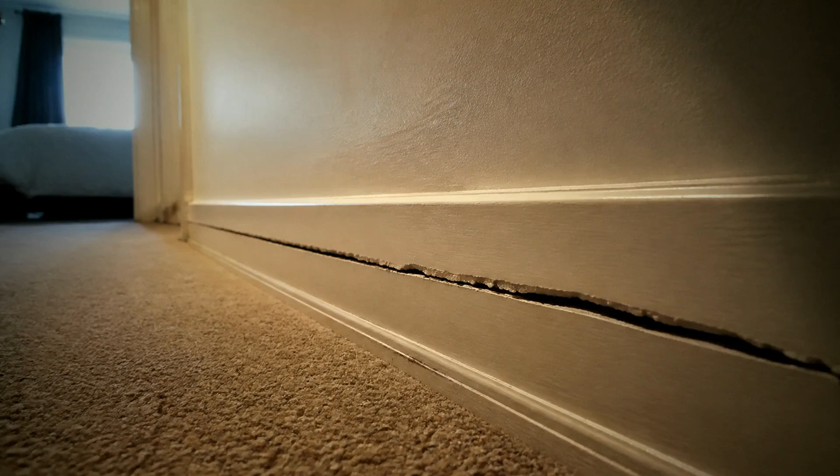Now, walk to the far corner. Try the door. It sticks. It binds in the frame. You have to shoulder it. Look down the hallway toward the bedroom. See that crack running the baseboards? It was not there last month. Or the month before. Now I want you to sit with this for a moment.

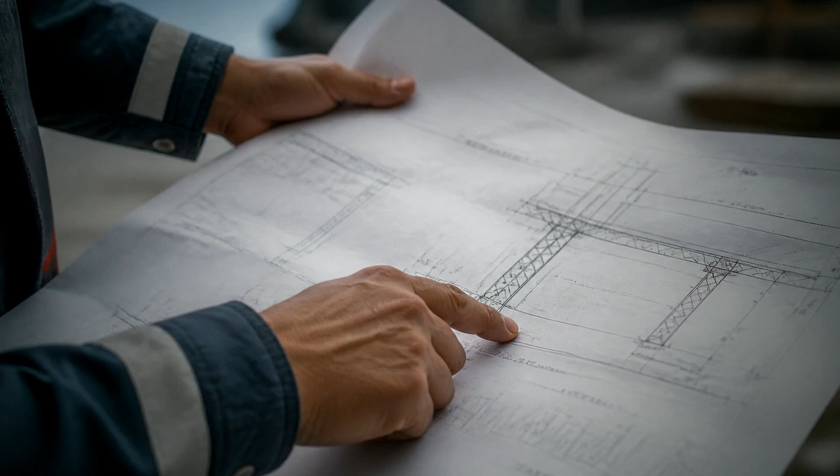This building is sinking. It has been sinking since the day it opened, and nobody told you. I am Dr. Hendrik Bale. I have spent my career reading what buildings do when we get the foundation wrong. My father was a structural engineer. He taught me to trust what the ground tells you first.

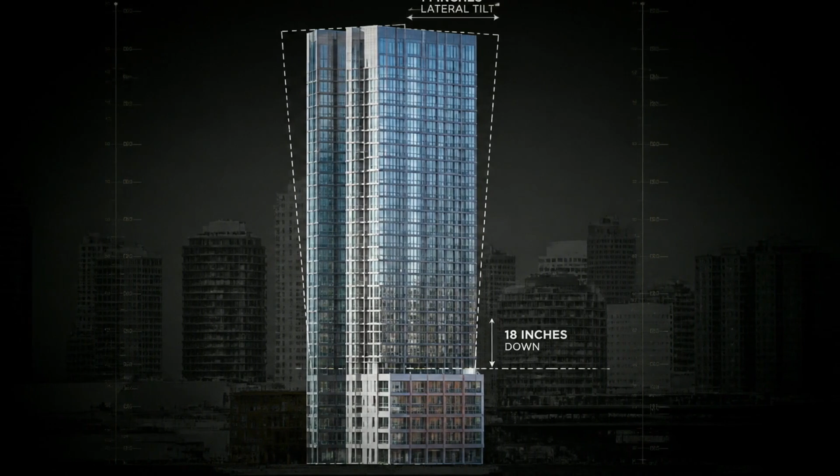What I am going to show you is how a $350 million landmark nearly destroyed itself. The sinking started in 2008, the moment construction finished. 18 inches down, 14 inches tilted to one side, all of it hidden. By 2016, when the truth broke into the newspapers, residents had already paid millions for the privilege of watching their building collapse under its own weight.

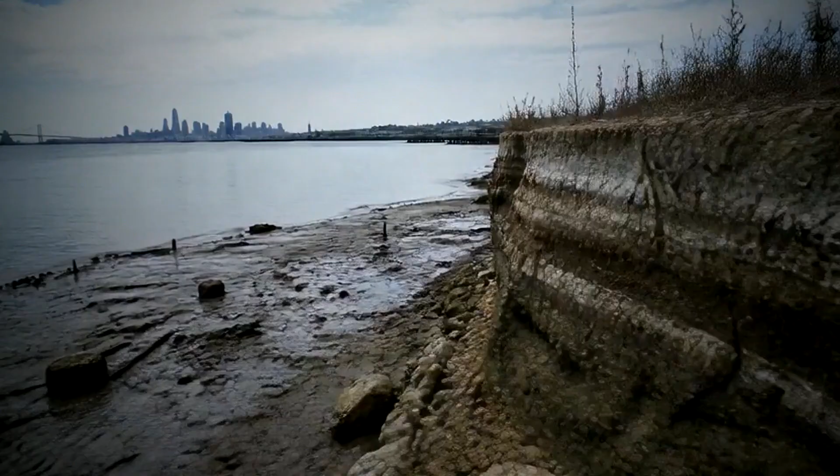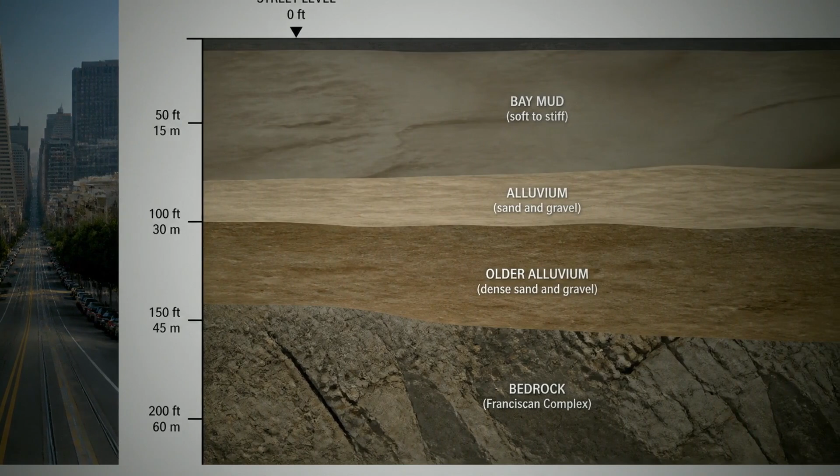This is the story of how that happened, and it starts with a choice made before the first beam went in the ground. You see, the architects and engineers faced a problem that day. San Francisco sits on bay mud, soft mud, the kind that compresses when you load it. A tall building there needs anchors driven deep, down to bedrock, 200 feet below street level. That costs money. Serious money.

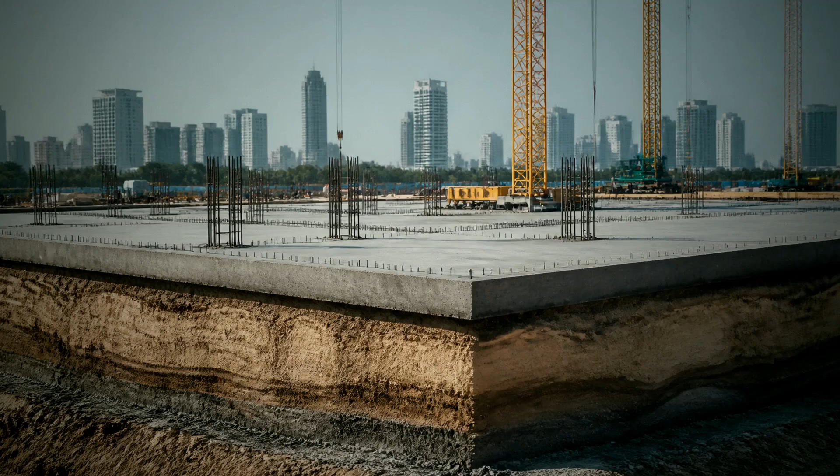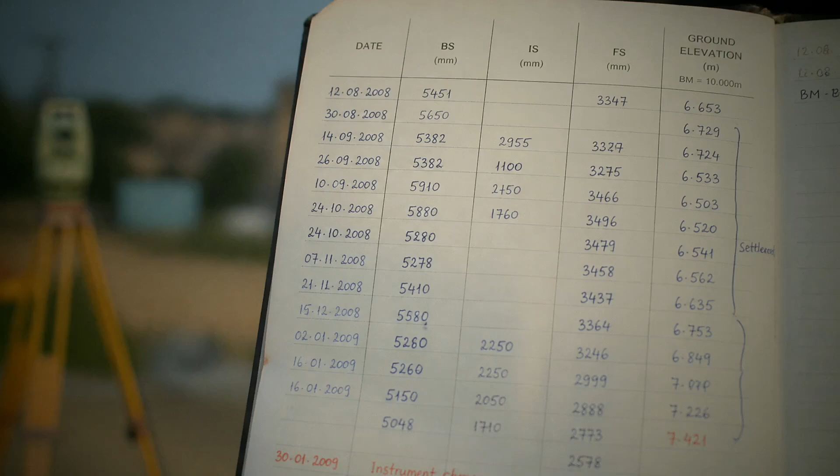So instead, they chose a concrete mat, a thick slab sitting on sand, on clay, and nothing deeper. It was a choice that looked fine on paper. It was not. And here is what makes this story interesting. The sinking started immediately, and they measured it the whole time. But nobody saw what the numbers meant, not for 8 years.

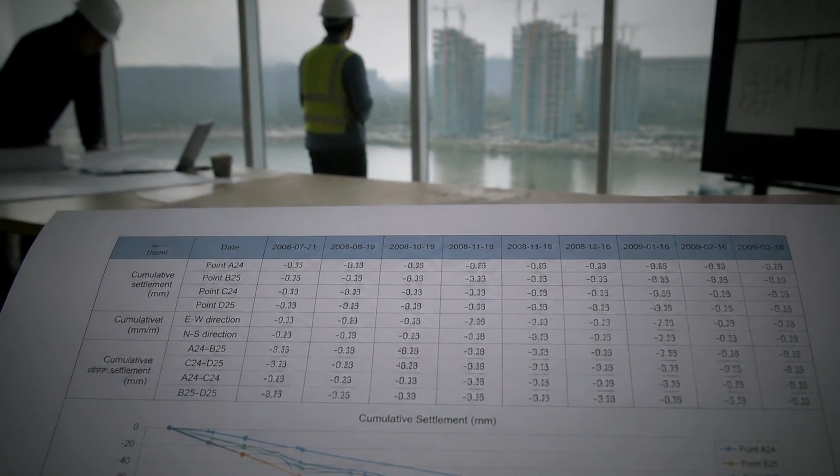Now, the reason for that sinking goes back to one decision the engineers made about how deep to anchor and what they decided to skip. Stay with me, because at the end, there is a detail about what happened to the soil next door that changed everything. That detail is what finally forced the city to wake up. So the building is already sinking, and now I need to show you the exact moment this was decided, the choice that made it inevitable.

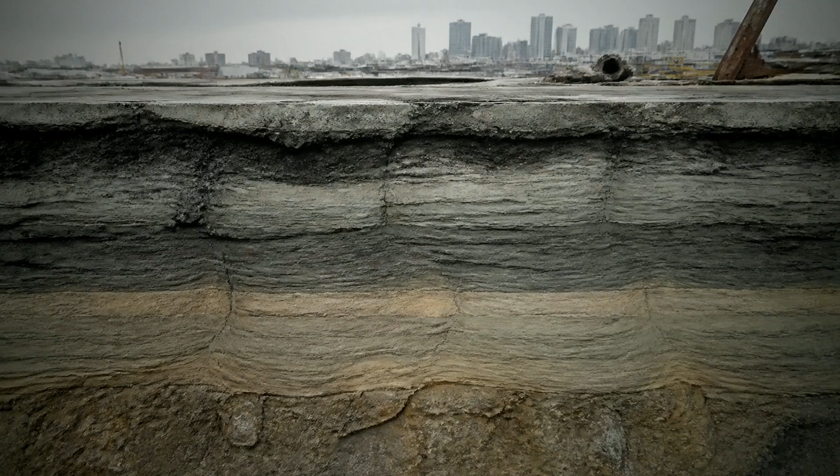In 2005, DeSimone Consulting Engineers sat down with the geotechnical team to design the foundation for 301 Mission Street. The bedrock beneath San Francisco lies roughly 200 to 265 feet down, buried under bay mud, soft as wet clay. Every engineer in that room knew bedrock was down there, solid, capable of holding the weight without moving an inch.

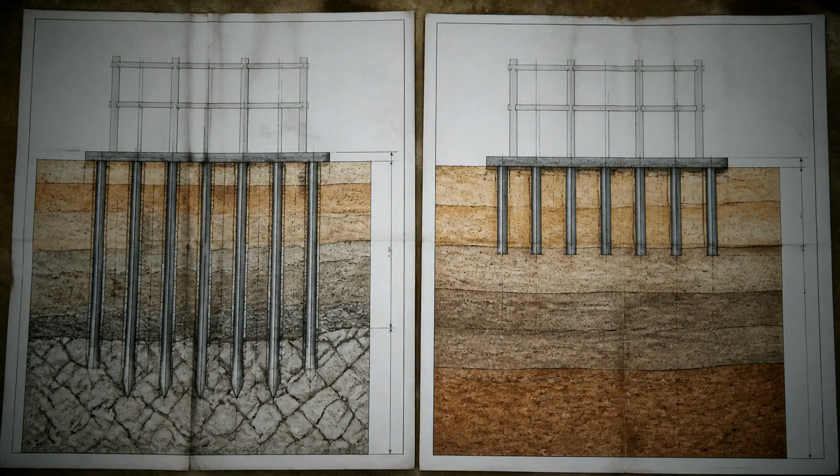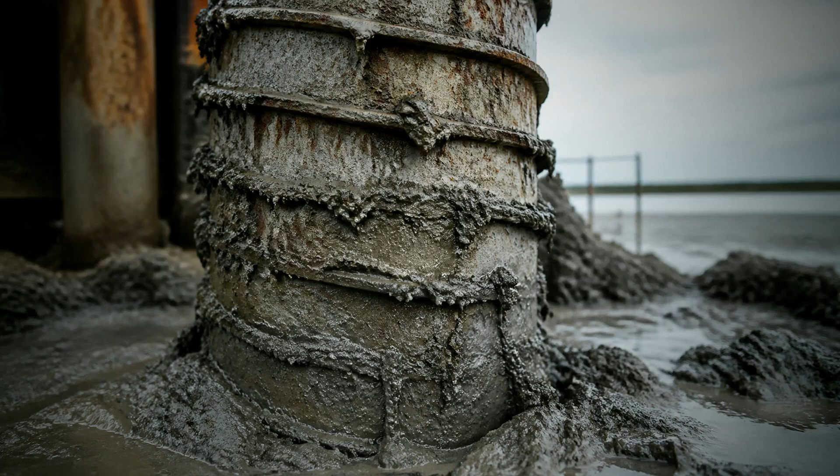But look at the two options on the table. Bedrock piles cost more money and take more time to drive. Friction piles, 950 of them, each 24 inches thick and 80 to 90 feet long, sit in the compressible mud itself. The friction piles grab the soil along their entire length, like fingers clutching sand. In firm soil, this works. In bay mud, you are counting on something that never stops moving.

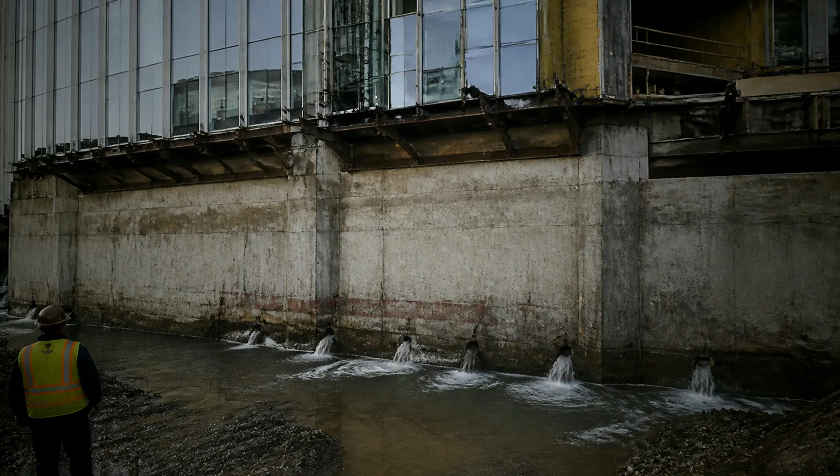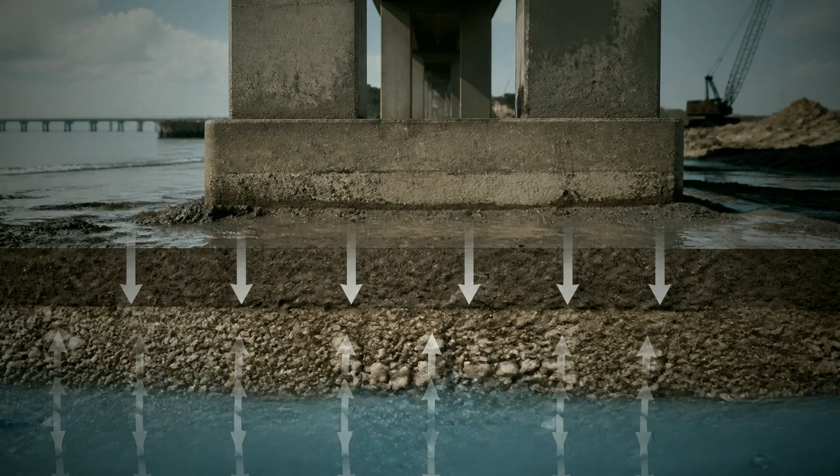Here is what I need you to understand about bay mud. It is young clay, loaded with water between its particles. Under the enormous weight of a 645-foot tower, that water has nowhere to go but squeeze out, slowly, over decades. As the water leaves, the clay compacts. The whole foundation sinks with it. The design allowed for some settlement, maybe 2 inches, maybe 3. The engineers ran the math and filed the permits.

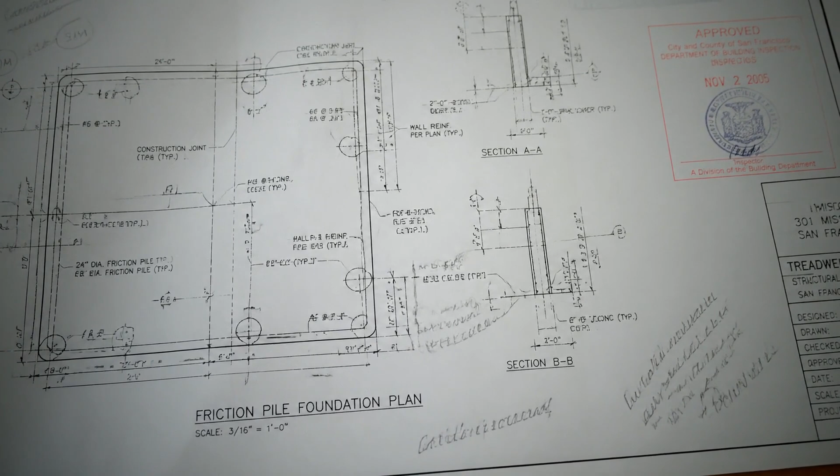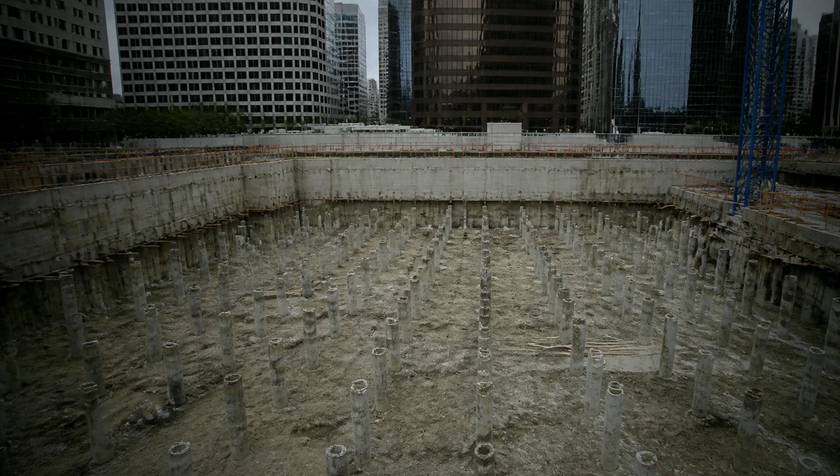The San Francisco Department of Building Inspection reviewed the plans and approved them. Friction piles were permitted under code. And there it was. The foundation system that would sink the Millennium Tower was locked in. November 2005. The Salesforce Tower, built right next door, went deep to bedrock at 260 feet. A different choice entirely. But Millennium Partners had chosen the faster, cheaper path, and 950 piles were driven down into soil that would compress for the next 2 decades.

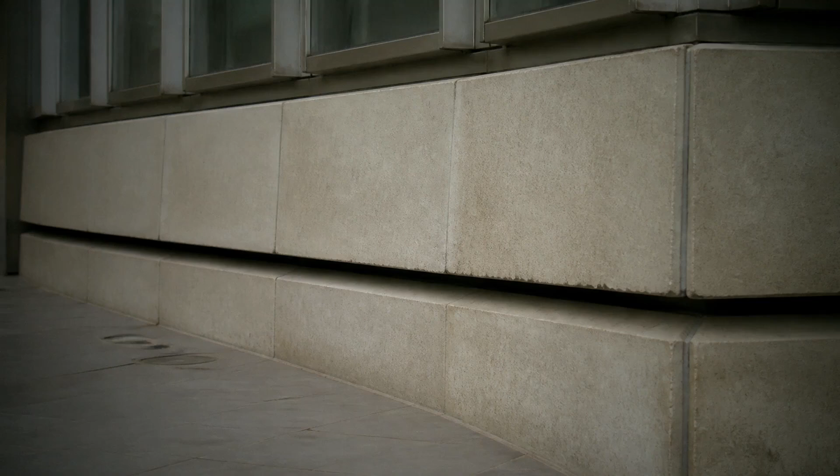By 2009, when the first residents moved in, the building had already begun to settle measurably beneath their feet. No one saw it. No one felt it. The sinking had started. But something else was about to happen just blocks away. Something that would turn the slow compression into a crisis.

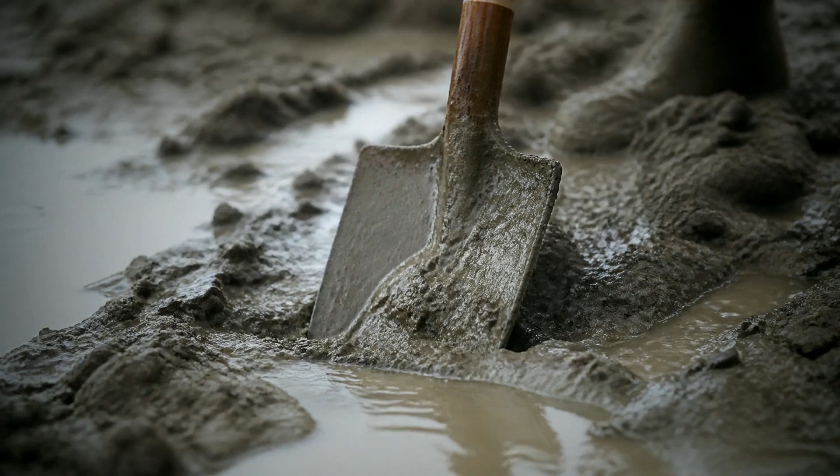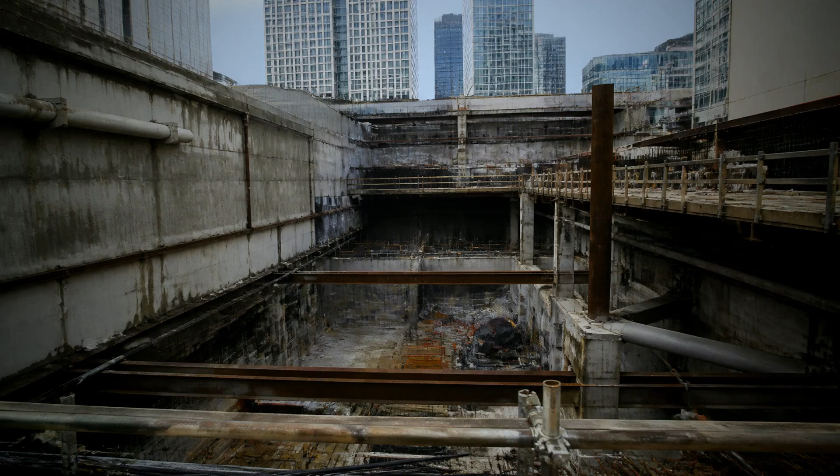So, the Salesforce Tower next door chose bedrock anchors. The Millennium Tower did not. Now watch what happens when that choice meets a shovel. In 2010, the Transbay Transit Center project broke ground across the street. That is a bus terminal. It sits mostly underground. To build underground in soft ground, you excavate. You pump the water out.

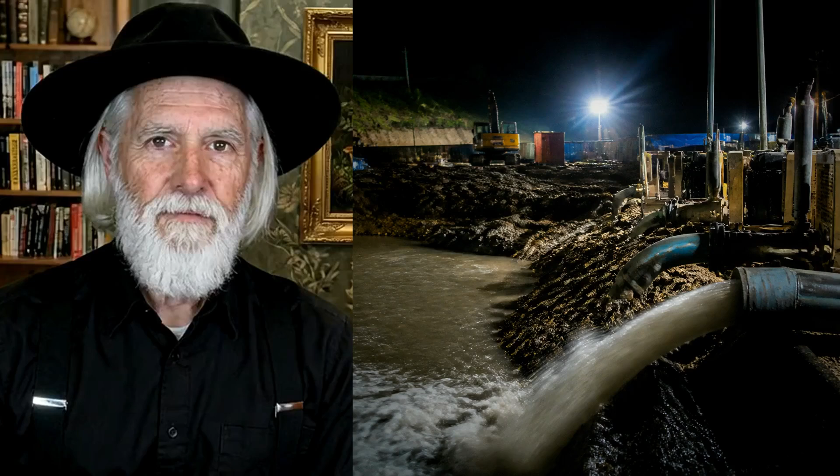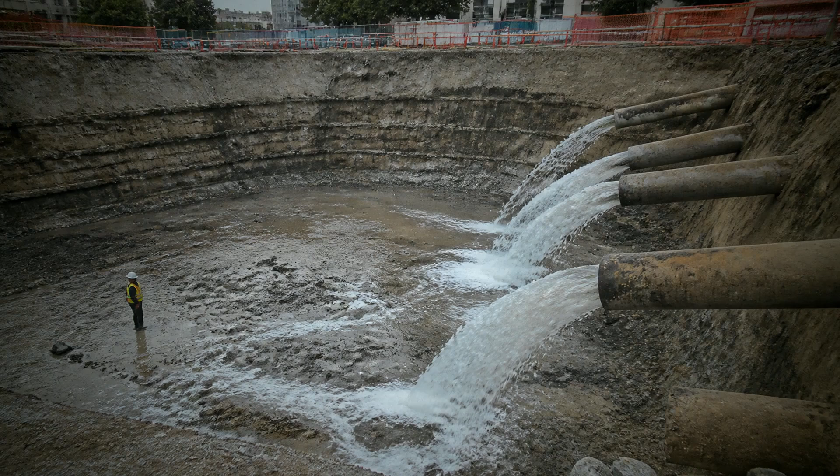I have done this work myself. The pumps run day and night. They pull millions of gallons of water from the soil around your site. You are standing at the edge of that excavation, watching water spray from the dewatering pipes. The groundwater that held the soft bay mud intact, that water is gone now.

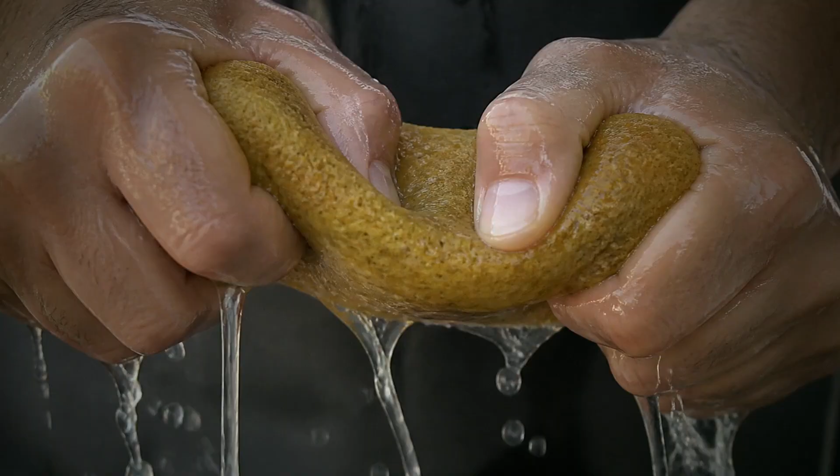Without pore pressure, clay and silt do one thing. They collapse and compact. Think of it like squeezing a wet sponge. The water leaves, the sponge shrinks. The Millennium Tower's foundation sat right next to those pumps, 65 meters away.

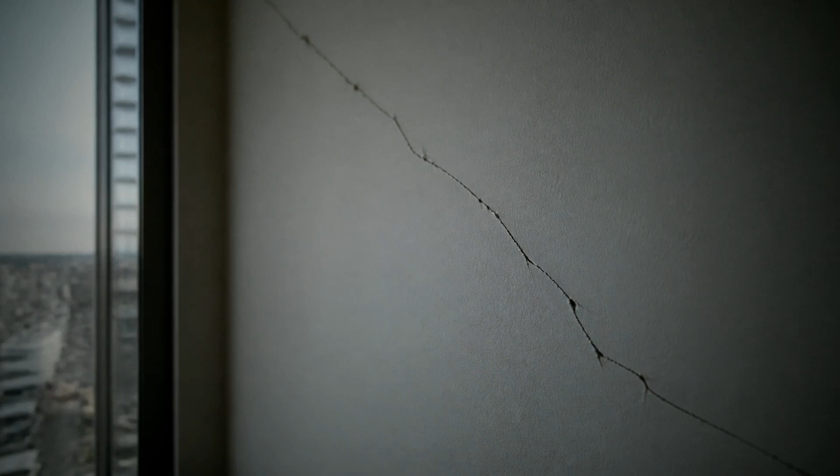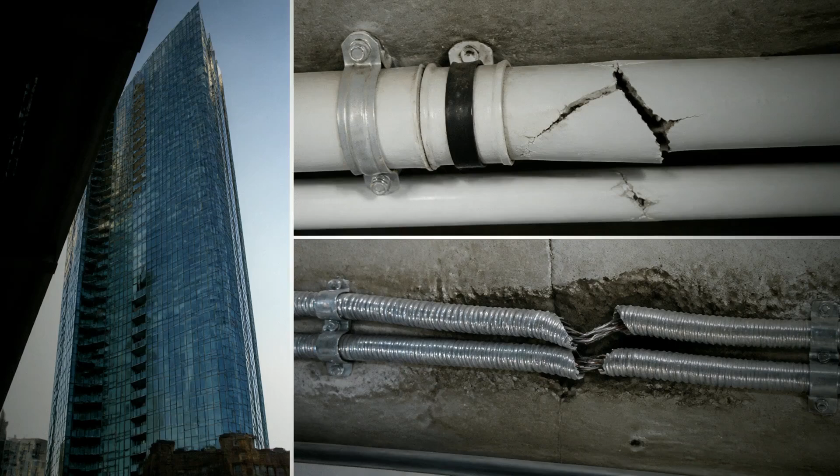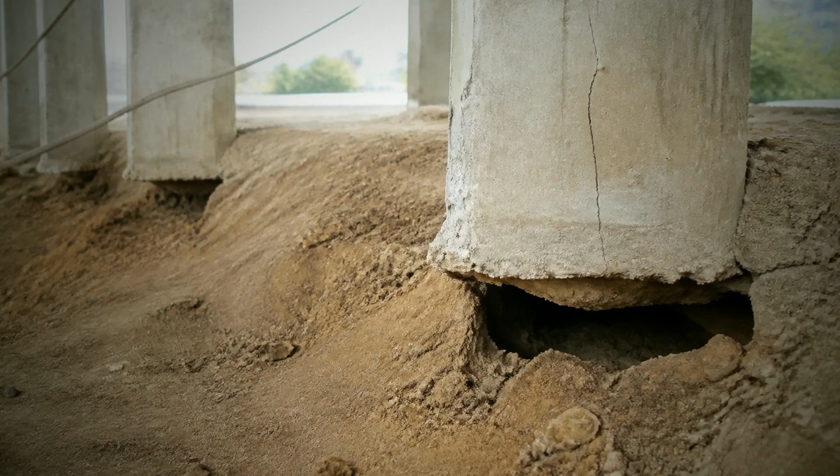After the pumps turned on, the rate jumped. The northwest corner fell faster. Differential settlement. That is what engineers call it when one side drops more than the other. The building began to tilt like a ship settling unevenly into the harbor. Elevators bind in their shafts when buildings tilt. Utility lines rupture or pull tight.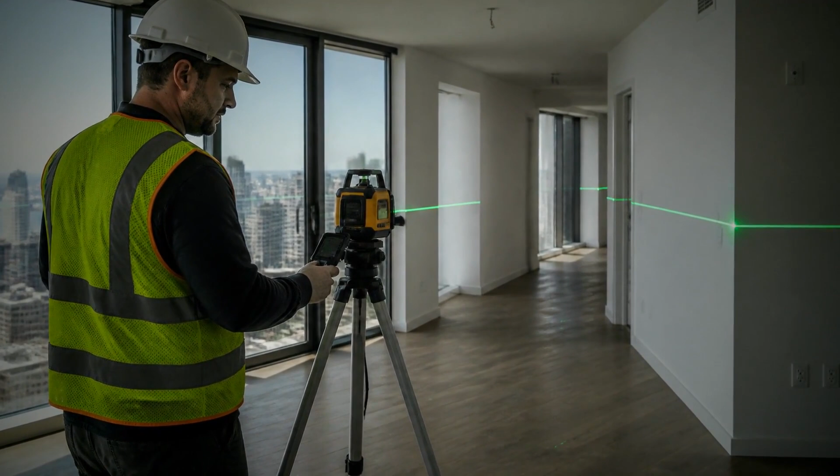You have concrete pilings designed to carry load straight down into stable soil. But when the soil itself vanishes, when the water leaves and the mud compacts, the pilings fail to anchor. A condominium on the 42nd floor cost $3 million. The unit doors no longer closed. Residents hired surveyors. The data came back. The building was tilting visibly.

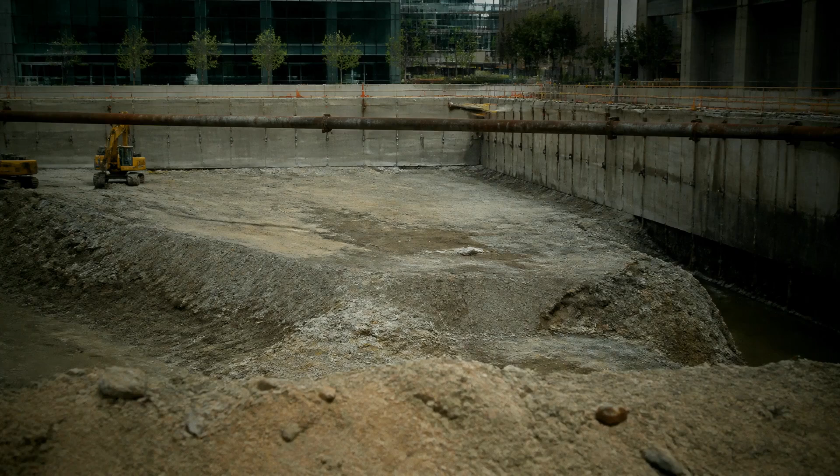By mid-2016, the San Francisco Chronicle published the first public report. That is when the silence broke. That is when lawsuits began. The dewatering was foreseeable. It was permitted. No recharge well had been installed. Nobody had re-injected water back into the ground to replace what the pumps removed. That failure, that single mitigation step, now stood at the center of the blame.

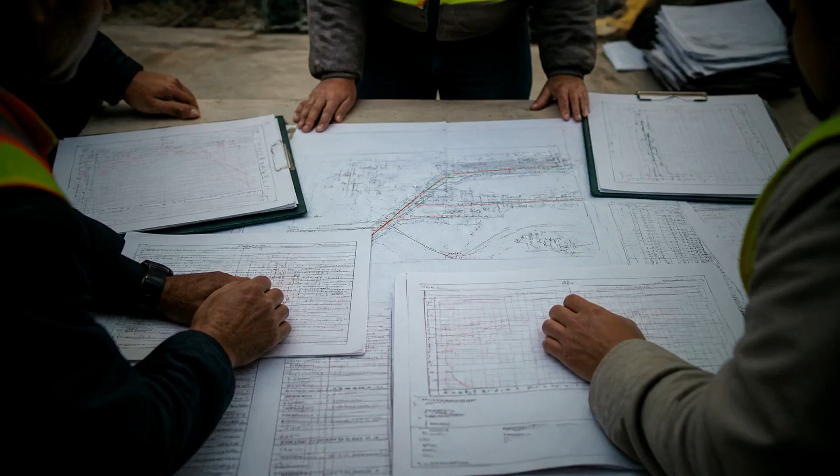And here is where the real battle starts. Two teams of engineers, each certain the other caused the collapse. With the building leaning and residents panic selling, the lawsuits arrived in 2016, and now the real engineering story had to be told in court. Millennium Partners pointed at the Transbay dewatering next door. The TJPA engineers pointed back at the shallow piles. Both were right, and that was the problem.

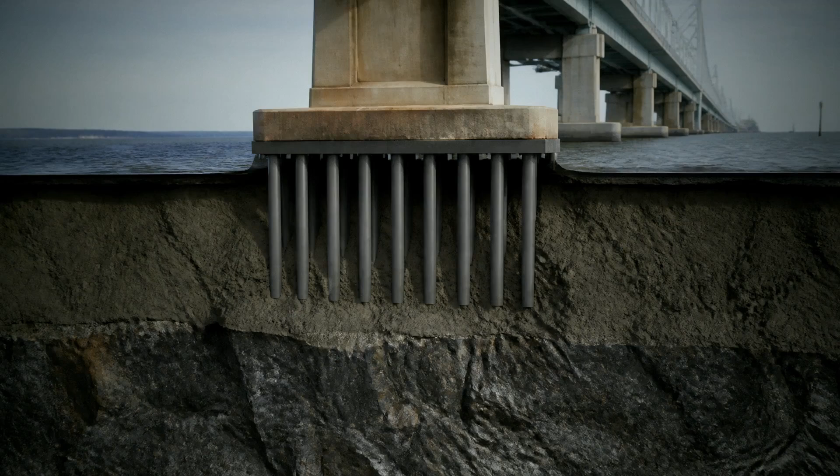You are in a deposition room. An expert is asked, did the building fail because of bad luck or bad design? The answer was both. The friction piles could have worked if the ground beneath them had stayed wet. Once the dewatering pulled the water away, the bay mud consolidated. 16 inches of sinking, 14 inches of tilt. The building's one fatal bet had been called.

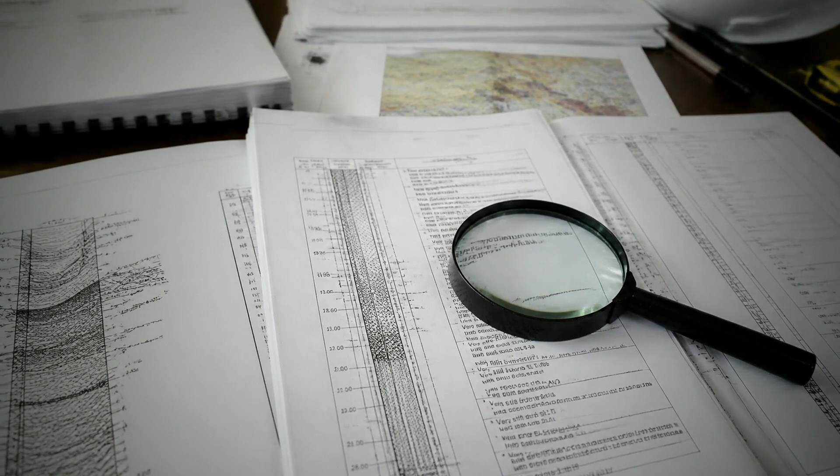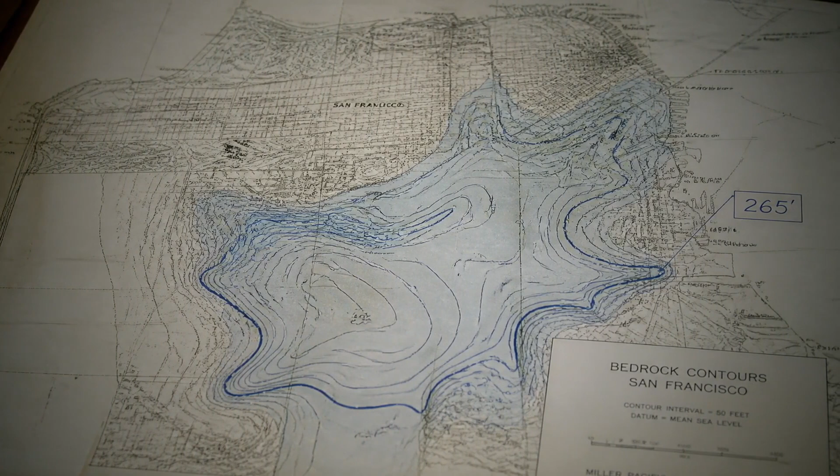And here is the part I promised you in the first chapter, the part that changed how I read every foundation report I see. The engineers who designed Millennium Tower had access to the same soil maps I do. They knew bedrock sat 265 feet down. They chose to stop at 90 feet. Why? Because bedrock piles cost tens of millions more. Friction piles were permitted by code. The code allowed a calculated risk.

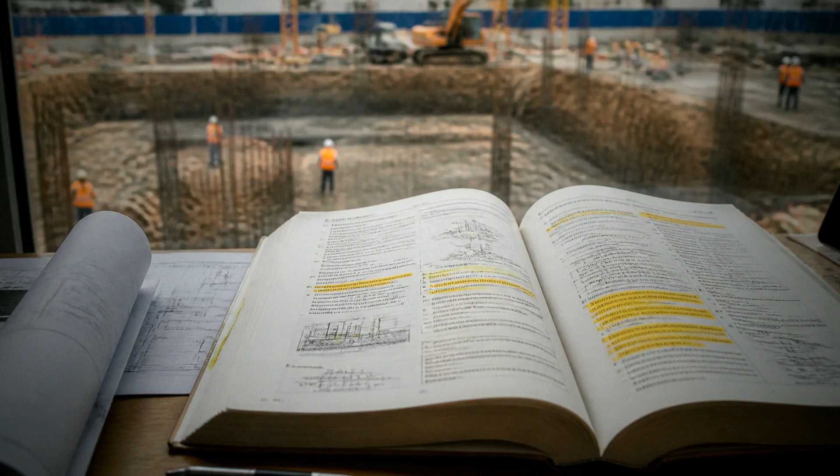And the code was written for normal buildings, on normal soil, under normal water conditions. Not a 58-story luxury tower. Not San Francisco Bay mud. Not adjacent dewatering. So the building did not fail because one person was careless. It failed because 4 decisions, each defensible alone, stacked into a tower that could not stand when the ground shifted.

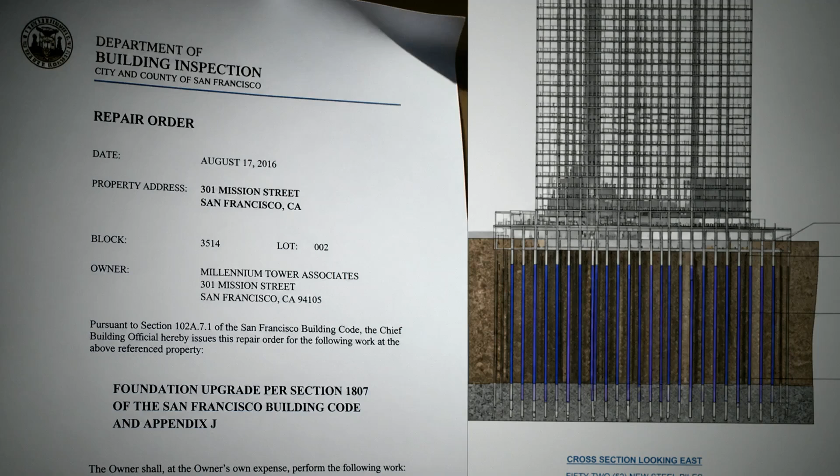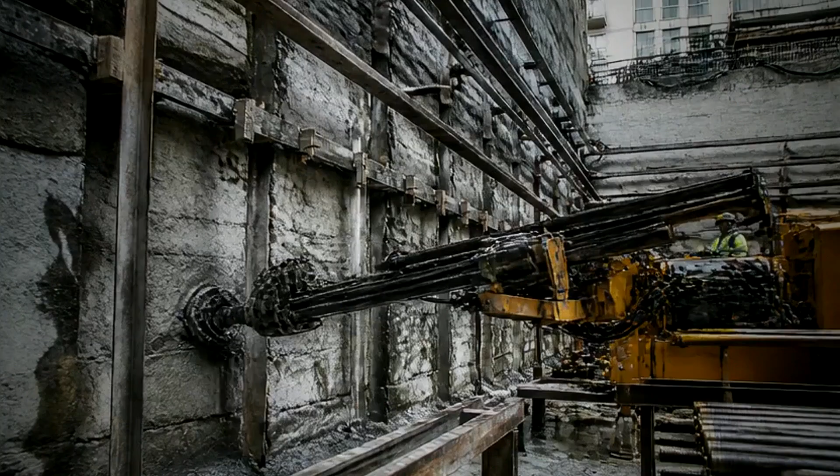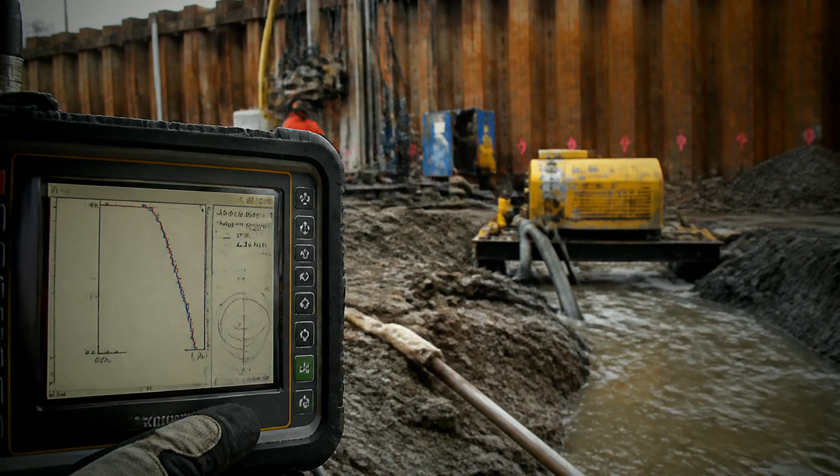By 2018, the tilt had worsened to 14 inches at the roof. The Department of Building Inspection ordered a fix. Drive new piles down to bedrock around the entire perimeter. 52 new steel piles, 250 feet down, drilled through basement walls while people lived above. Cost over $100 million. In 2021, during early drilling, the building tilted another 3 inches in days.

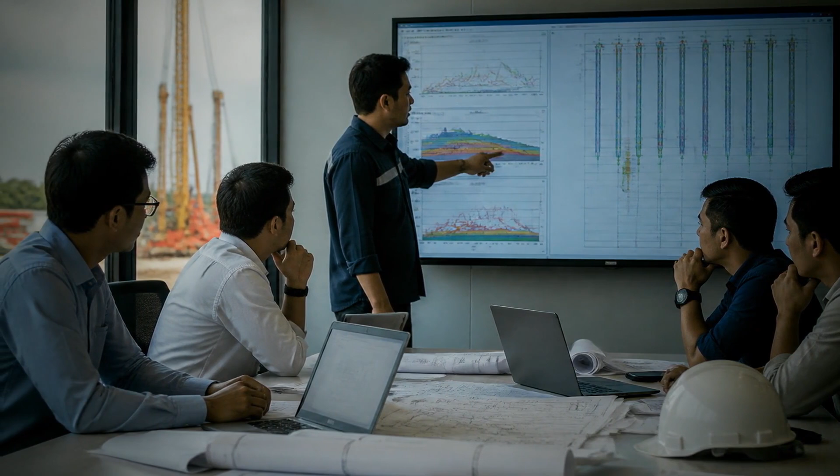The same dewatering that had broken it was now breaking it again, even as they tried to save it. Work stopped. Engineers reset the sequencing. They learned that even the cure could wound if you did not understand the soil beneath. By 2023, the new piles had arrested the sinking. The building will never straighten. It will stand permanently out of plumb, a monument to a shortcut that cost $500 million.

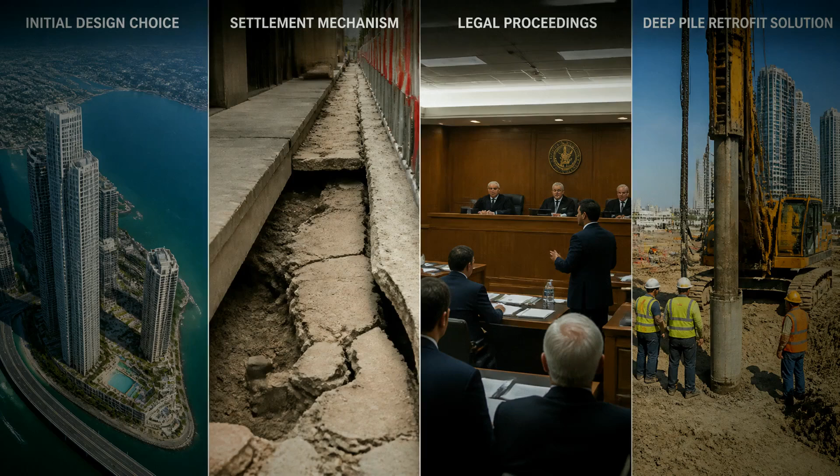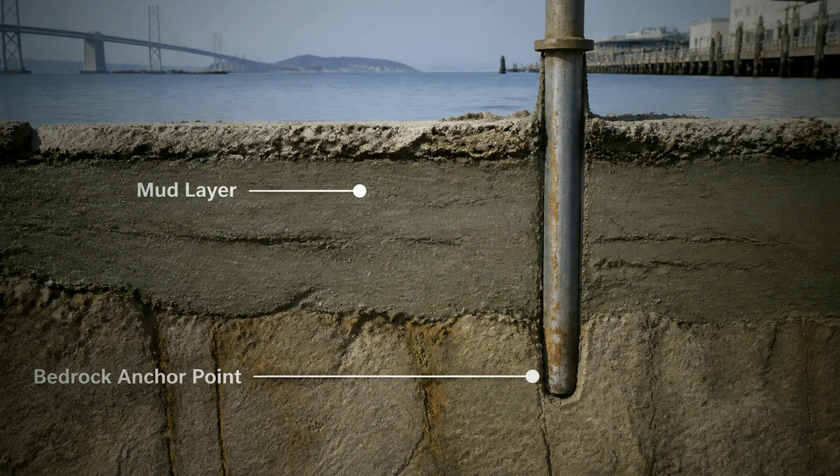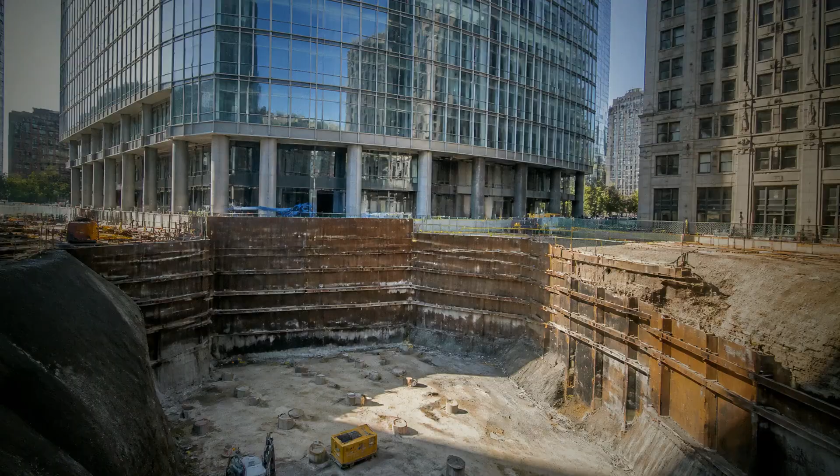Now, look at what we have just walked through. A design choice, invisible failure, a trigger event, a legal reckoning, and a desperate technical answer that nearly broke the building again. The Millennium Tower teaches one lesson above all. The ground does not forgive shortcuts, but it will tell you exactly why. When you walk past a new building, look at its base. Ask yourself, did they anchor to bedrock, or did they bet on the mud?